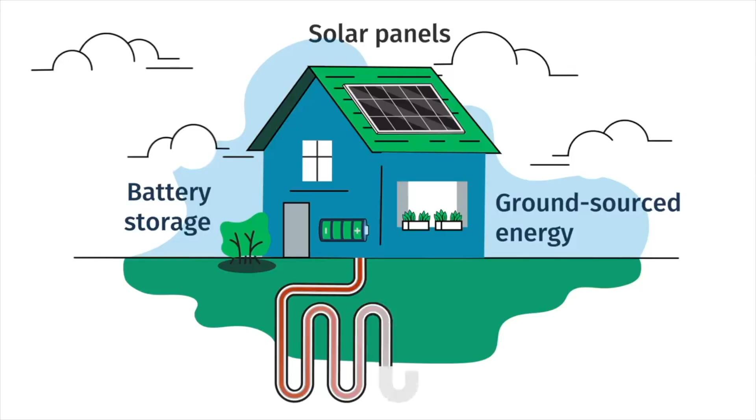Modern, renewable, local energy from rooftop solar, batteries, and geothermal heating and cooling sourced from the ground are proven technologies and are available. These modern systems can withstand climate change, disruptions to the grid, and are affordable too. So how does the Sustainable Energy Utility, or SEU, work? Residents and businesses in Ann Arbor can sign up for this optional utility service. We'll help you determine the right solution for your needs, considering rooftop solar panels, an energy storage battery, or joining a neighborhood ground source heating and cooling system.

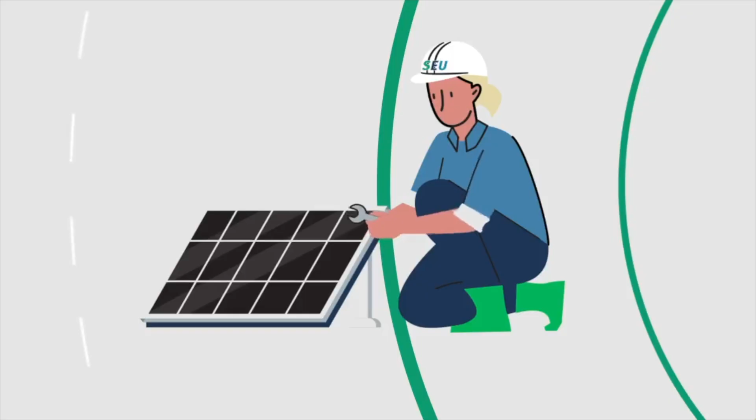We install these systems at no upfront cost to you. Simply pay a monthly rate for clean, green energy from the SEU. You'll stay connected to your current energy utility. However, you'll be using less energy from them, so you'll see savings on your current provider's bill. The Ann Arbor Sustainable Energy Utility will own these energy systems, the same way other energy companies own power plants. So you're off the hook for maintenance. The Sustainable Energy Utility covers the upkeep.

Ann Arbor voters overwhelmingly supported and authorized the creation of this thoughtful, first-of-its-kind municipal energy utility. This means, as a local, not-for-profit, the Sustainable Energy Utility belongs to you and prioritizes our community values, including equity and carbon neutrality. Your rates are invested back into service, operations, and, frankly, our planet, not lining the pockets of shareholders. What's more, we're your hometown utility, based right here in downtown Ann Arbor. The Sustainable Energy Utility is welcoming neighbor after neighbor and business after business to connect. Ann Arbor, you're invited to join. The future of energy lives here.

So we're a utility. As the video told you, we're a completely new kind of utility. There's no model for this anywhere, and no playbook for it. We'll share with you what we're thinking of doing, and you got a sense from the video. But when we talk again in, say, a year, things will be different than we're envisioning now. We are a startup. We are trying things, we're going to learn from how they work, and we're going to pivot. We might pivot some things by next week, and others might take a few years. So we are learning and building this plane as we fly it, and I hope all of you will help be our engineers, mechanics, and consultants through this process.

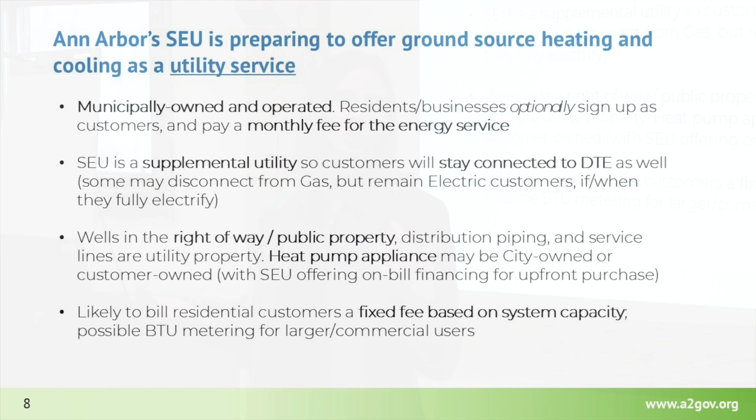Lastly, we are very likely to bill at least residential customers a fixed monthly fee based on their system capacity—so based on their heating tons or something of that sort. We've looked at metering and variable rate billing too, and BTU metering might make sense for larger commercial customers as we build systems serving commercial users, but probably not worth doing on the residential side. For those following what we're doing on the solar side, we're also intending to do fixed monthly rates for solar based on the capacity of the solar system folks are installing.

So this will just be consistent with that. That's the framework for geothermal as a utility service. We will, by the way, be the first geothermal utility in Michigan when this is up and running.

So we are preparing our first pilot system in the Bryant neighborhood, and that's the one we want to talk most deeply about today, although of course we can also talk about how this expands citywide.

For those who aren't familiar with it, we had some handouts describing a little bit of the history of the work the city has done in the Bryant neighborhood. This long predates me, and Missy and her team have done extraordinary work with the Bryant neighborhood, really resident driven, which is one of the things that makes it so powerful. This was not the city coming in and saying, hey, you guys, we think you should be carbon neutral. It was working with the city residents to say, what do you want this neighborhood to be? It's a very, very engaged community.

I've had the privilege of just starting to get to know them in my recent months here. They have committed as a neighborhood to becoming the most sustainable neighborhood in America and the first carbon neutral existing neighborhood. This is really different than building a new development where it's easier to start off clean and fresh. This is an existing neighborhood with homes from the 1950s and all of this old infrastructure, figuring out how to transition an existing neighborhood to clean energy sources and a lot of other work with it.

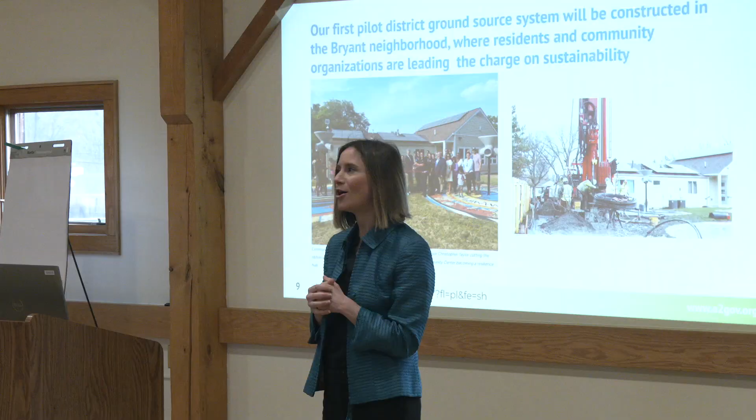Here's a picture of the community center. The Bryant Community Center has solar on its roof, and you can see a picture of a muddy day of drilling. It also has its own geothermal, and hi, Derek, the director of CAN out there. So really, really excited about the work with the Bryant neighborhood.

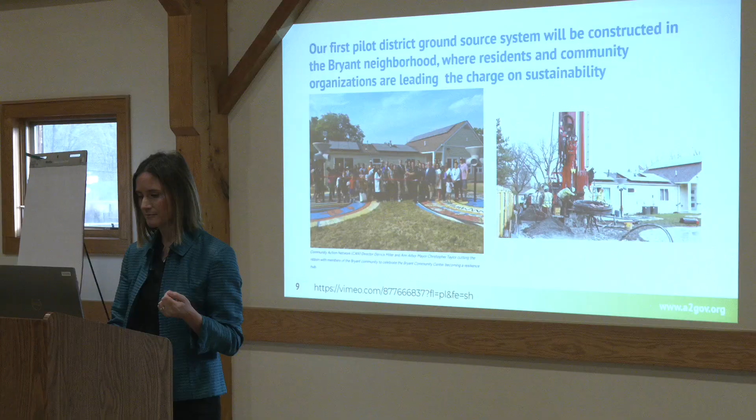All right, next thing about this project. The wonderful news is that the work is supported by $11 million almost from the Department of Energy. We are so grateful for this. Missy and her team again, and IMEG, put in a huge amount of work to get this application ready for DOE and to make the case for why this is an incredible investment for the federal government to help support.

That said, even with that, the economics are really challenging, and that's one of the things I hope today we can have some conversations about and get input from all of you on how we can make this as efficient as possible. Economics are always challenging for a first of its kind project, and there's some things unique to the Bryant neighborhood that might make this particularly challenging. But let me tell you a little bit about it.

There's the $11 million grant from the federal government. We're required to bring a match of that, 100%, whatever we get from the federal government, we have to match. So if we want to be able to use all $11 million that the federal government is giving us, we have to bring a minimum of $11 million in match.

As IMEG has designed the system, there's modular components to it, so we can scale it in different ways. At a minimum, we probably need to spend about $15 million to get a viable system out of it. It doesn't make sense to drill a quarter of a well field or put in a quarter of a pump house. So as you look at the economies of scale, we think we want to do a system that's at least about $15 million.

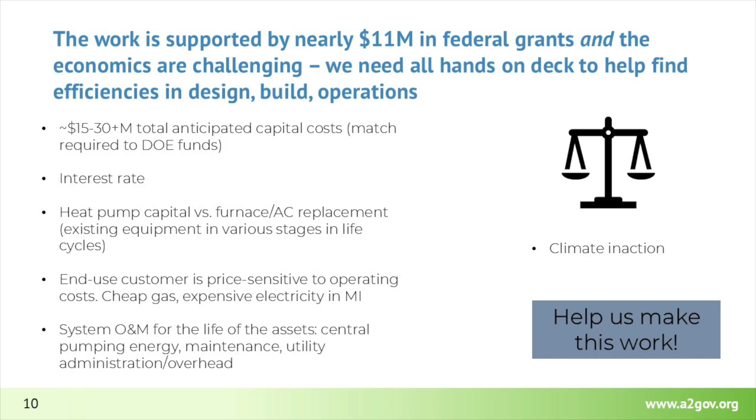So those are the challenges, and I'm looking forward to you guys helping solve it, because the flip side is we could say this looks too hard and walk away. We believe we can't walk away. The price of climate inaction is too high, much, much higher than the cost of all those other things we just talked about. So not solving this is not an option in our minds. We are going to solve this, and we're looking for you to help us figure it out. By the way, municipalities all over the country are watching to see what happens here, so what we figure out and solve here can be replicated everywhere.

Okay, that's my story, and I'm going to turn it over to the IMEG team to show you the actual system design, and you can start salivating over it or getting your questions ready.

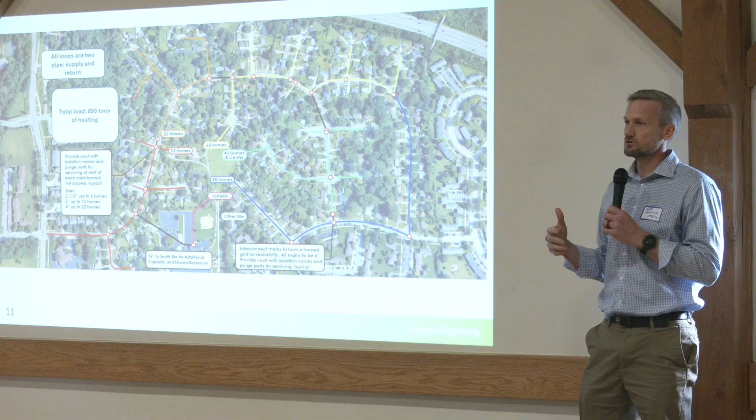So we envisioned how we would serve this area up here to the north. There was also a site to the south which has public works and other facilities, so there was an overall concept to also connect to other commercial buildings, because these systems work best when they can share energy with other buildings that aren't homes.

So I think the long-term vision is thinking about how a community-based system could also hook into these other types of facilities in the future and make a really robust system. I think that's still the vision for this, so we're setting this up to do that.

Walker will go through a little bit more on the distribution, but overall it was how do we capture 262 homes in this initial phase with all these different loops that are up here. So that was the initial focus, with redundancy, reliability, and scalability in the future.

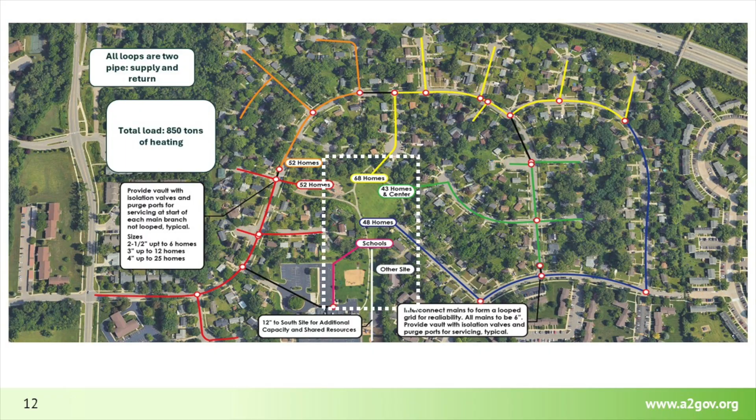Thanks, Adam. So reminder, I'm the geothermal designer for IMEG, so it was my task to look at the community and try to figure out how we could find resources to use to get the BTUs that we need for the homes. There were a few more properties around the neighborhood that we evaluated.

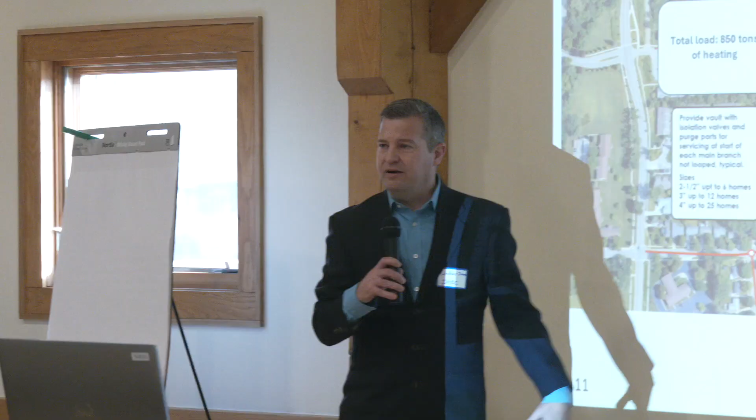But ultimately we decided that the couple of park areas we have here in the center of the neighborhood and around the school made the most sense. We had the most real estate available, and it was centrally located, so it became a really good synergy for us.

So we're planning to drill several hundred holes, about 200 in the main park, maybe 100 on the adjacent site. We were planning to have underground distribution, so we would tie all those wells together through a vault.

We'd bring that back to a central pump station where we could then either distribute out to the community or just recirculate in, depending on what the call is.

So there might be some days when we're just pumping around two homes, sharing energy from one home to the next. And there are certainly going to be times when we need a lot of BTUs out of the ground. We either put our excess heat into the ground in the summer for cooling, or we'll pull it out in the winter.

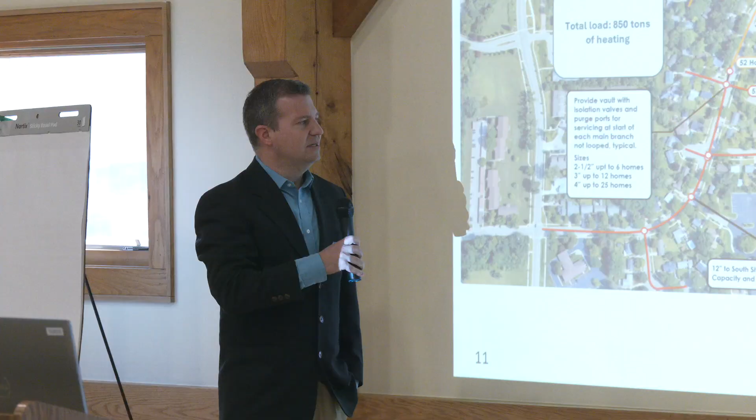So one of the other challenges was distribution, and I'll pass it over to Taylor here to talk more about the distribution. How we get that energy from the central park out to the community was also a challenge.

So we envisioned this, as we're talking here, like a utility system - a little bit more like you have maybe for domestic water distribution, somewhat of a gridded network system where we'd have nodes where we could maintain reliability, effectively pumping out of the central location to all the homes through various networks.

The initial phases of this job will be focusing on a few specific areas of this network, but long term we plan to get distribution to the entire community.

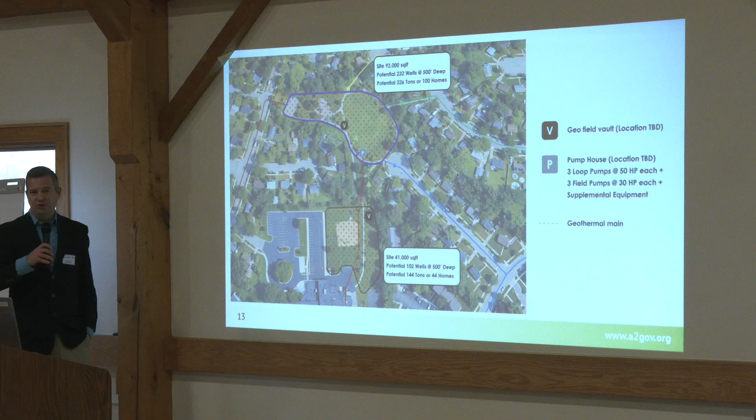And so here's that concept of the geothermal well field, bore field. So again, we've got the main park area. This P is kind of where we envision the pump house. That is still very much a fluid design from our standpoint.

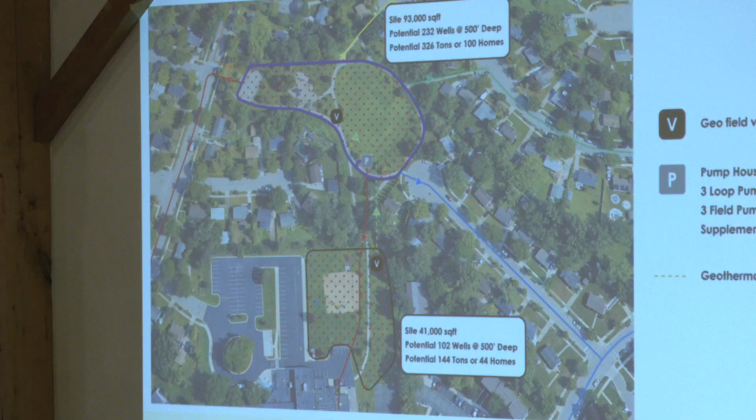We're evaluating building designs and locations as we speak. The V's are basically vaults.

So again, the idea - this rough representation of the wells that we would be drilling - and below the surface, about 6 feet down, we'd have a whole network of pipes joining those wells together, bringing them back to these vaults. And then from the vaults, we would come back to the central pump house.

This purple line basically represents the main distribution loop that we would have. And then all the spurs that would go into the individual blocks and homes within the neighborhood would basically feed off of that spur. We color-coded those to make it a little easier to see - the various colors here basically represent distribution out of this central network to each of the homes in the community.

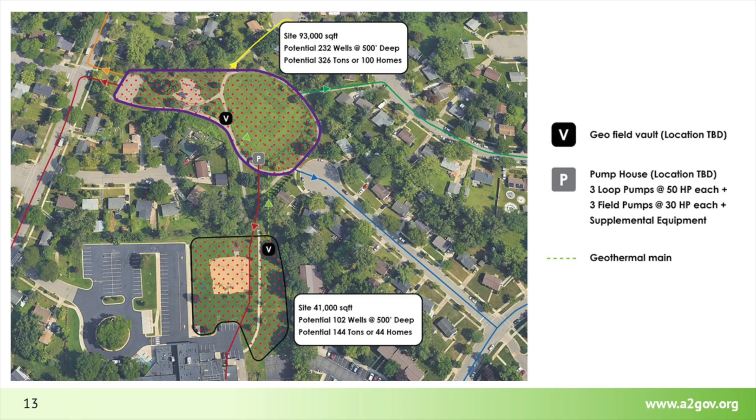And then I'm going to hand this over to Taylor to talk about that distribution.

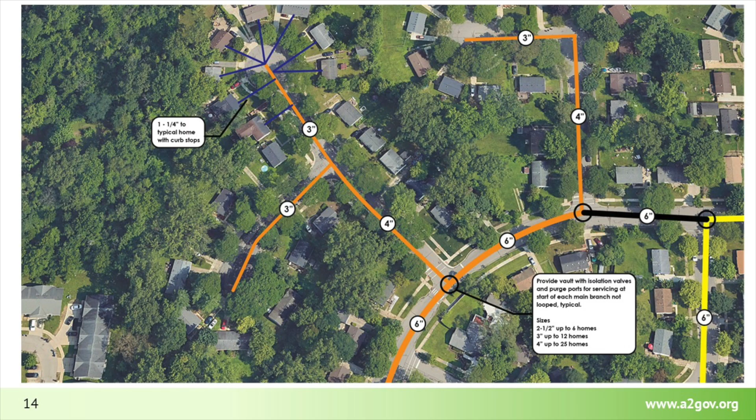And that's the concept at this point. Would love to hear if you think of something different, or something that from a practical standpoint of installing those pipes makes a little bit more sense. So...

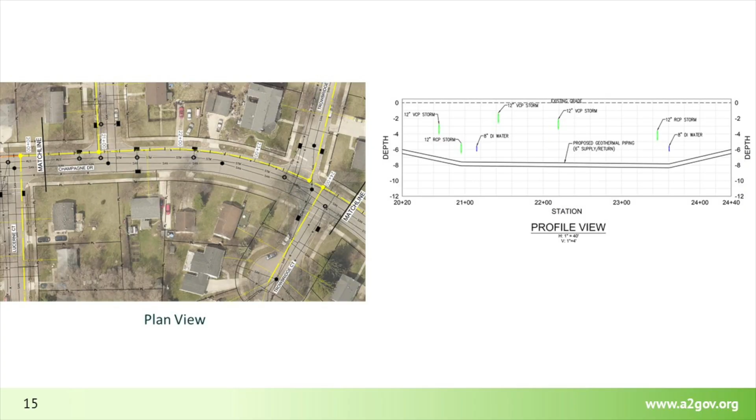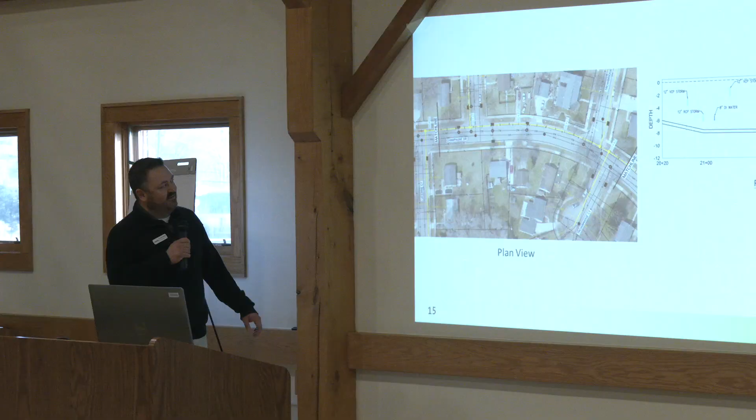That's the typical distribution to home. This is a lot more engineered version of that, right? So if only we just had geothermal to deal with in the right-of-way, in the street, it'd be a pretty simple project, right? But we've got a few utilities we get to deal with.

The first part of that is what does that look like in a plan view, in the XY component? Staying within the right-of-way, minimizing disturbance to the street itself, right? These streets were repaved a couple years ago, so we're not just going to go in there and install geothermal and leave the streets a wreck.

We've got to come back and rehab those streets. How do we approach that as part of this project? Because those are certainly additional costs. We're dealing with wet utilities - storm, sanitary, water - but we also have gas, electric, communications.

It's pulling the needle through the haystack and then finding it on the other end here. The other component to that is, since everything else is already in the ground, we have to go deeper, unfortunately. So this is what a typical profile would look like.

Here's our geothermal pipe, and it's 6 to 8 feet below the surface. It's below our sanitary sewer, which is typically the lowest. So there's some additional challenges there if we're talking about trenching versus boring. All things that we need to think of, and what the best approach there is.

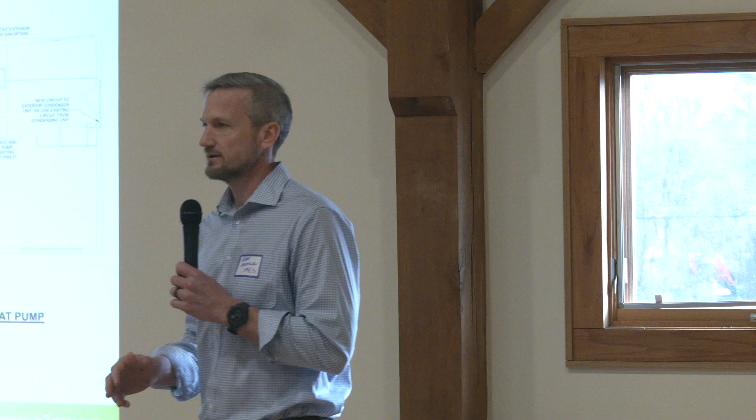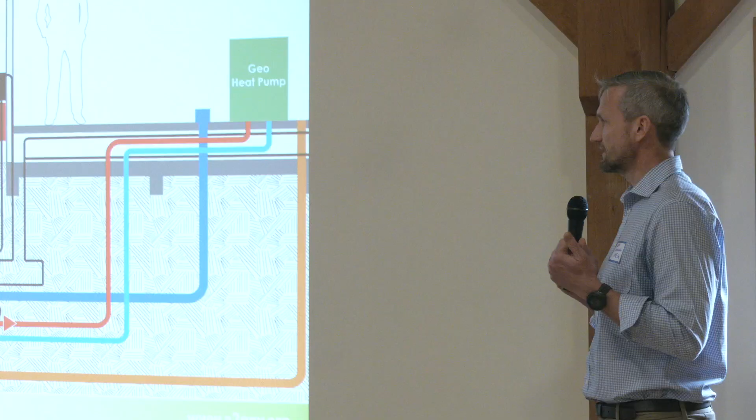We've done geothermal projects, hundreds of them around the country, a lot for individual buildings or homes. As a utility, redundancy and isolation matter. If this central utility has a disruption, you could take 50 homes offline from heating at a very critical time. So part of the network design has separate multiple loops that can backfeed one another, and the two pipe design is there for redundancy. There's a lot of engineering thought going into how this works as a utility, not just a single building with a single field.

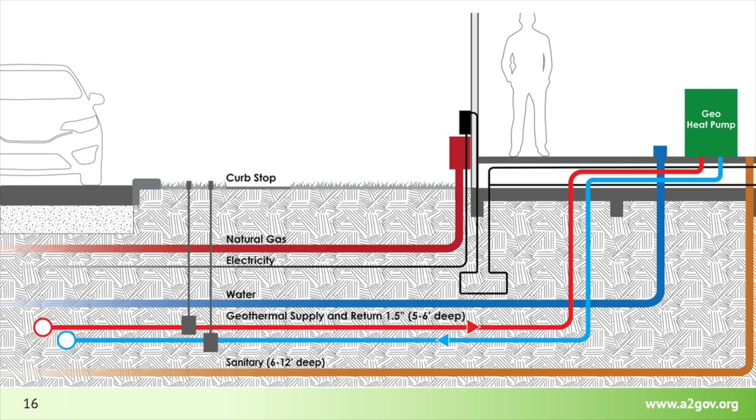Even at the home level, we have curb stop isolation, because if a single home needs some service, we can still run the rest of them on the street. So a lot of that thinking, as we brainstorm today, is how can we make it even more robust and resilient going forward as a utility.

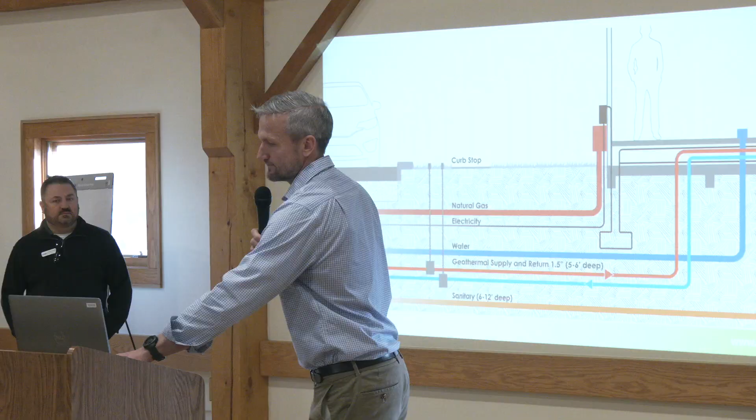Then the last piece is the home. A couple in your room went through these homes with us to figure out where we can put these units. At a high level, a lot of these homes have a centralized furnace in a closet, and most have air conditioning as well. So one option is to just replace it with the compressor inside the home as a single unit, as shown on the left.

Or the other option is a split system, where we have just the air handler in the home connecting to the existing ductwork, with an external condensing unit, which would make it easier from a maintenance perspective. Whether all homes need to go one direction for that maintenance reason, or what the utility decides, is still to be determined, but there are a couple different options, and different homes have different configurations, though a lot of them are set up this way.

So let's talk about schedule.

Right now we just completed our existing conditions survey, identifying where utilities are, where the streets are, where the houses are, really giving us a good background for our design. We've started the design process, and I'd say we're roughly about 30% through it. Obviously, through the grant phase we did quite a bit of work, but now it's the meat and potatoes of it.

As we work through the design, we're also working on procuring contracting, and that's where you guys come into play. At this point we're approaching this as a CMAR, construction manager at risk. I don't know how many of you are familiar with that approach, but it's a procurement move that's pretty nationally known.

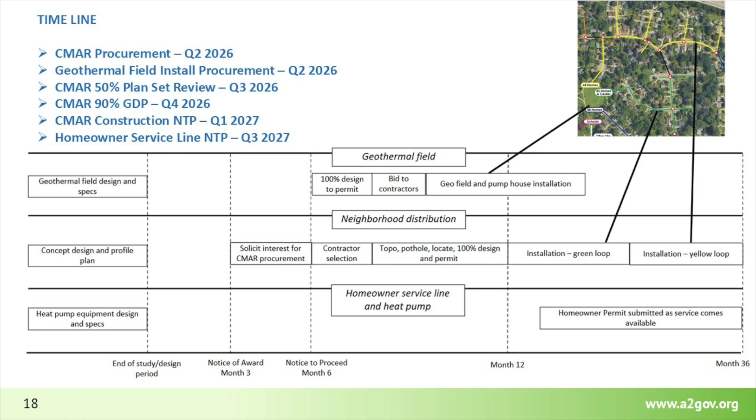The second part is that who better to give us pricing than the contractor. We engineers try to claim we know what pricing looks like, but we're not the experts. So we bring you guys in, we start throwing out options on paper, and then you say, no, that's a horrible idea, or yeah, I like where this is going, maybe do this. So we include the contractor in those discussions for the designs and the standards for the design. It creates a great partnership with everyone involved, and ultimately leads to the success of the owner, which is the city.

So CMAR procurement, we're going to start in the second quarter of this year. We're also working concurrently, and we're not really sure how this is all going to fit. There's sort of three components here: we've got the geothermal field, which Walker talked about, we've got the neighborhood distribution, and then the third item is the homeowner service line and heat pump.

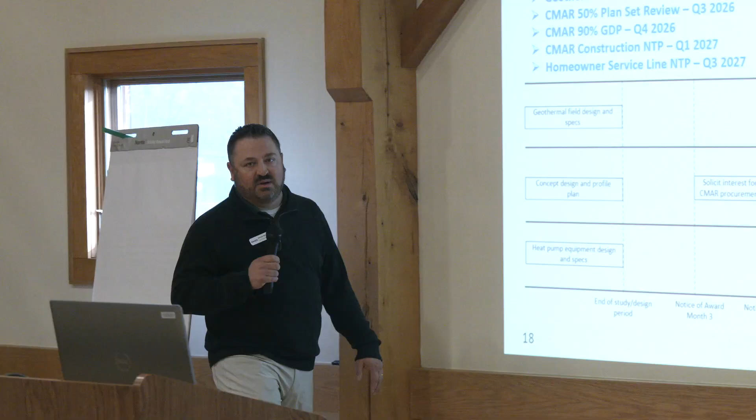So the CMAR contract may include any portion of those. We know for sure it's going to include the distribution system. We're considering including the geothermal field as well. If we decide to go with a traditional design bid build on that, that would also occur in the second quarter. Our CMAR 50% plan set review is set for Q3 of this year.

That's a critical stage because then we hand the plans over to the contractor and say, give us input and give us a price. What does this look like? What are the hurdles? What are the risk registrations there? And then at 90% plans, we're going to get a guaranteed maximum price, or GMP, and that's set for the fourth quarter of 2026. So that guaranteed maximum price is basically what the contractor thinks for the scope of work we've shown, that they can have it installed and constructed at that price.

And that's when the contractor will enter into a construction contract with the city. For CMAR construction, we anticipate a notice to proceed no later than Q1 of next year, with the anticipation that our first service line notice to proceed would be Q3 of 2027. So that's what the timeline looks like, subject to change.

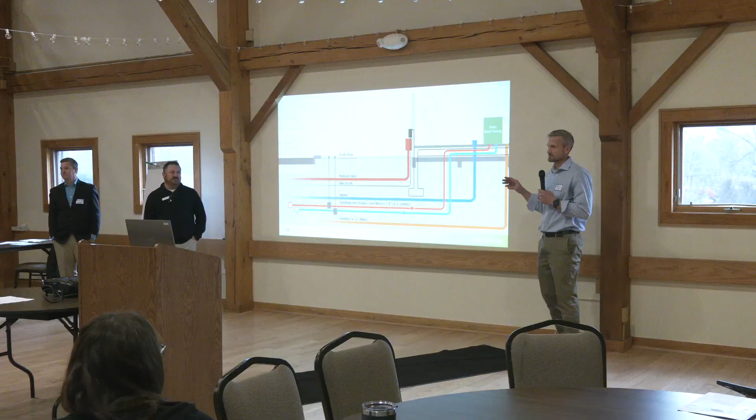I would add to your point, we don't want to dig that hole twice, so that alignment between this contractor and the installing contractor needs to happen at the same time. If those are both procured under the same contract, that would be under the scope of the same general contractor and could be coordinated that way. If they were separate contractors, we would need tight coordination on schedule to make sure those stubs go where they need to go. That's a pretty important piece of it. Any question there?

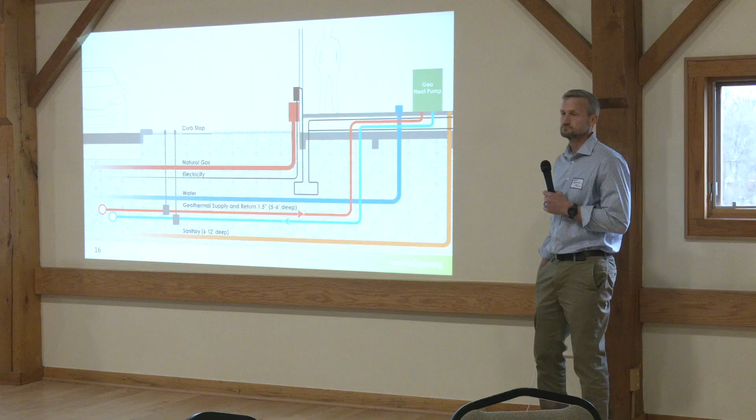I had a question, if you could - you mentioned very briefly about the HVAC. Could you explain a little further about the two options? You mentioned one was a split system and one was putting everything inside the air handler cabinet. And secondly, do you have the distribution of what is existing in those 262 homes? Are they all furnace AC, or?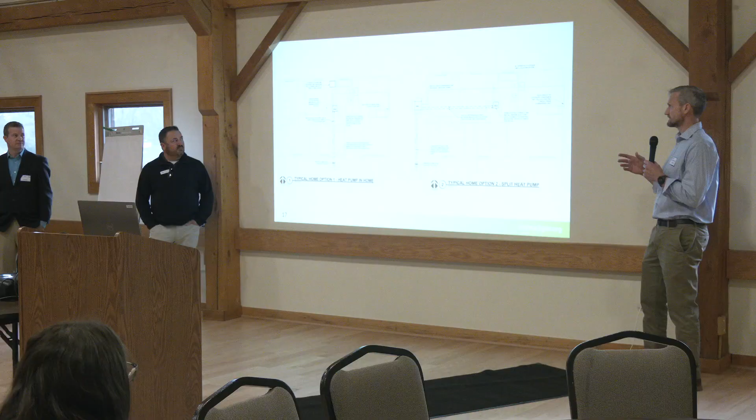Yeah, so the majority are furnace AC throughout all the homes, and a lot of them are this same 1,000 square foot footprint. There are some other mid-sized homes that have a little bit different distribution, and some of those actually have a more dedicated mechanical room in the basement with even more space. So this kind of represents what I would say is the tightest condition for the homes.

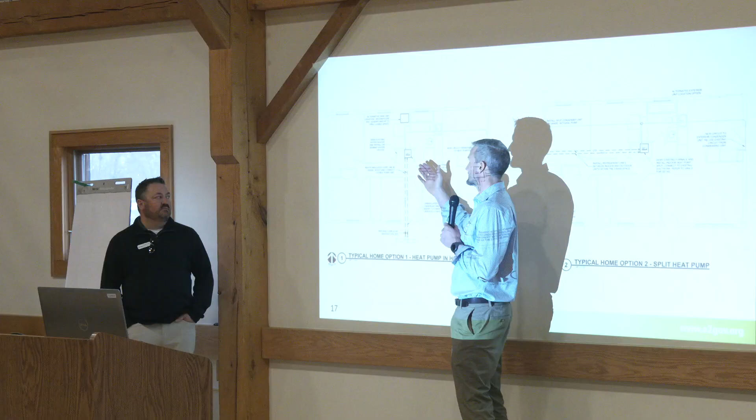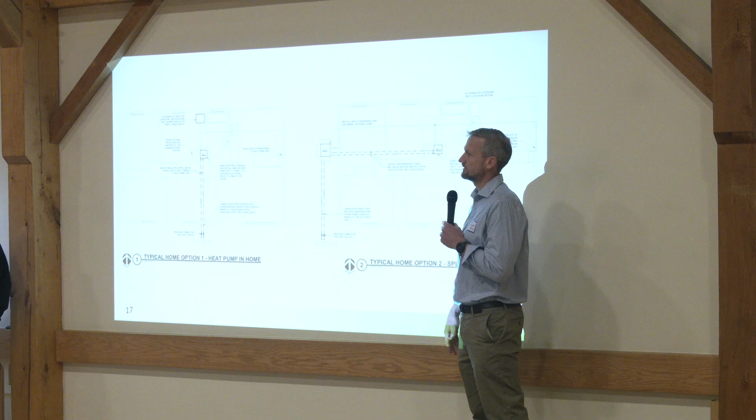So in this case, most of them are more of this arrangement where there is just a dedicated furnace here with the water heater, and then there's an air conditioning unit, usually in the back, that's currently connected. So this option would be just to keep everything and the compressor within this closet, so it would all be self-contained, with pros and cons to that. But we do think this might be the more common option, to have a split system, so this unit is outside, serviceable by a utilities representative outside the home, and then you would just have an air handler here, and the refrigerant piping would go to this outdoor unit.

Are they mostly slab on grade or basement? Yeah, it's crawl space underneath. So that's another piece too, with certainly freeze protection in the line and glycol and those considerations as well. But most of them do have, like what was in that other section of the home where there's a crawl space, you could get through that foundation wall, and then in that case you would come up through the floor.

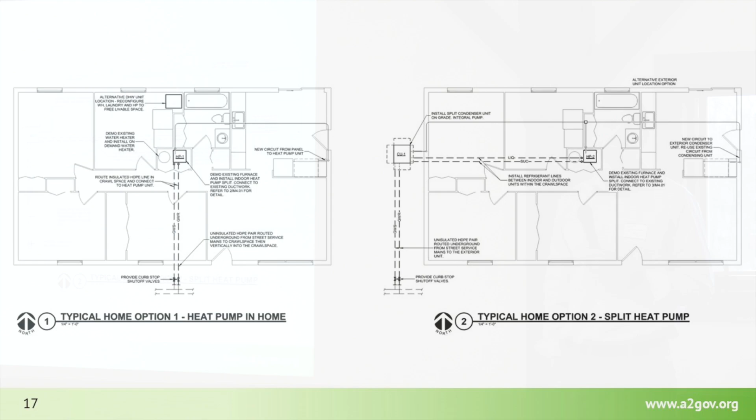Can I just chime in and say, well, first of all, this is Derek Miller. He is the Executive Director of Community Action Network. You can talk for yourself. Do you want to introduce yourself?

Sure. So as Missy said, Executive Director of Community Action Network. We manage 7 community centers throughout Washtenaw County, primarily in under-resourced neighborhoods. And specific to this particular neighborhood, we have our Bryant Community Center that's already on its own geothermal. It's already been converted over, and we're actually 2 gas water heaters away from having it fully off of gas at that particular facility.

It's also a resilience hub that has solar and batteries as well. And this geothermal design is actually part of a much bigger picture that I probably missed earlier, but it is, I would argue, our last critical piece for the decarbonization journey that we have going on for this particular neighborhood. And we're well on our way on the other components as well.

I don't know if I have much else to add other than we're obviously very excited about this. This is one of those kinds of projects that you'd often probably find a lot of NIMBYism just because of how disruptive it actually is. But thankfully, through our planning process with the DOE planning grant that led to this moment, there was a lot of community involvement, and so it's not going to be coming at all as a surprise. We actually had a lot of engagement, a lot of excitement from residents, which we're obviously going to lean into because this is quite the project and quite the disruption as well. But we have a really solid foundation that we're actually building from for it. So excited to try to get this fully launched.

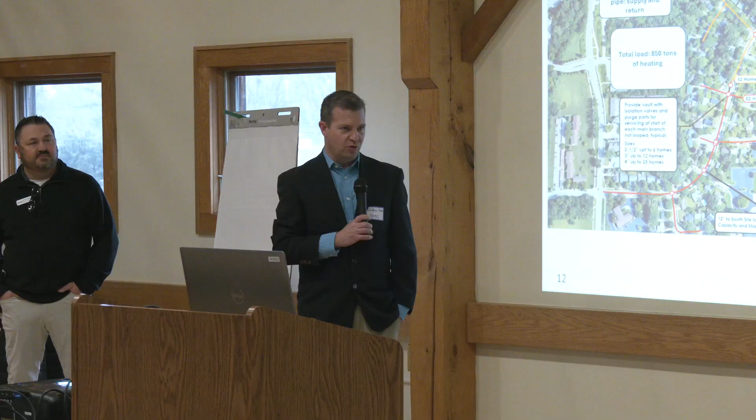Have you thought about a connection procedure for the contractor, where on a typical install you flush the system out and eliminate any air? What's the plan moving forward in the district network? That is one of the challenges. What we're planning is a lot of these nodes, as I mentioned earlier, will have isolation and flush ports. If there's a more localized issue, it depends on whether this is the initial build out, the first 10 homes on the block, or that one home that wanted to do it 5 years later. So the process could differ depending on when it's going in.

The majority of those homes are of 2 similar floor plans with AC units and similar spaces. Would it be beneficial to take the stub-ups to those anticipated locations, to limit excavation closer to the road and do it once? So you could hit option 1 or excavate down for option 2, a one-time dig scenario, just getting it closer to the house.

I think that's a good thing to bring as options. As a utility, having it in the easement with that maintenance piece, we'd just need to make sure it meets those requirements, but I see where you're going with that. And the other piece too, to the pumping losses, we do have a system with many spokes on a wheel, intended to help bring down pumping losses. The other thing we didn't talk about: those black lines between some of the colored loops are lines that could backfeed loops if there are issues with part of the pipes, so we can build in that redundancy. Those nodes become multi-purpose for a lot of reasons in that design.

Did I hear earlier that you'll require a minimum of 10 homes on a block to plan for geothermal in that block or neighborhood? Critical mass, I guess, is what... I'm asking whether it be a neighborhood, or the entire city, has that been defined? I know the DOE go/no-go decision had a line item requiring scale, but I don't remember if it identified the number of customers.

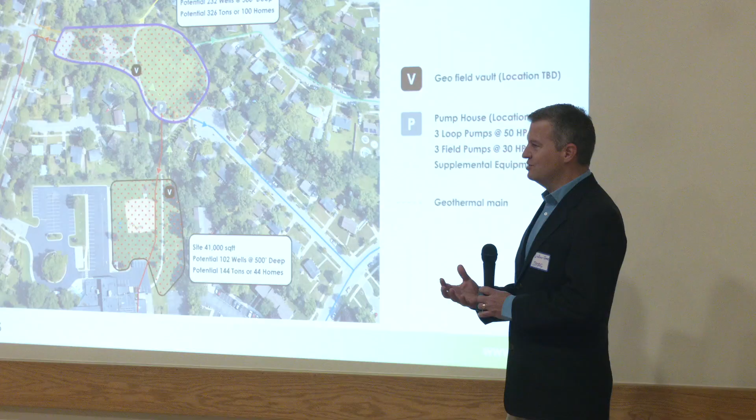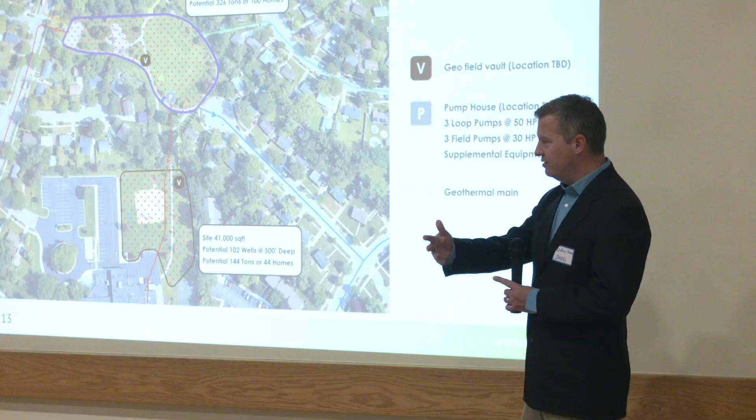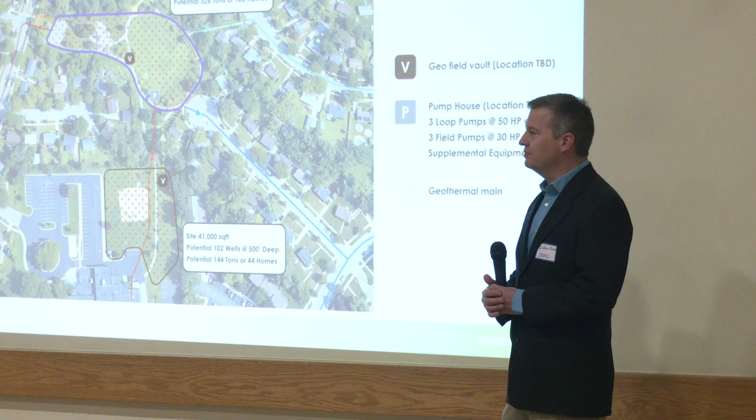Let's say in the main park over here, we've got 200 holes. We may have 1 or 2 vaults. All we're really doing, if we've got 100 holes, is group up maybe 10 of those together onto a common pipe. All the vault does is bring us to a common place where we can consolidate that. Just think of little streets in the neighborhood merging onto the freeway - the vault's basically our freeway. It gives us an ability to phase the construction, so maybe we only need to do 30, 40, 50 holes at a time. We can connect those in, and it gives us a place to isolate those. So if there were ever any issues, maybe somebody came back in and got careless with the backhoe and hit a line, we could isolate parts of the system.

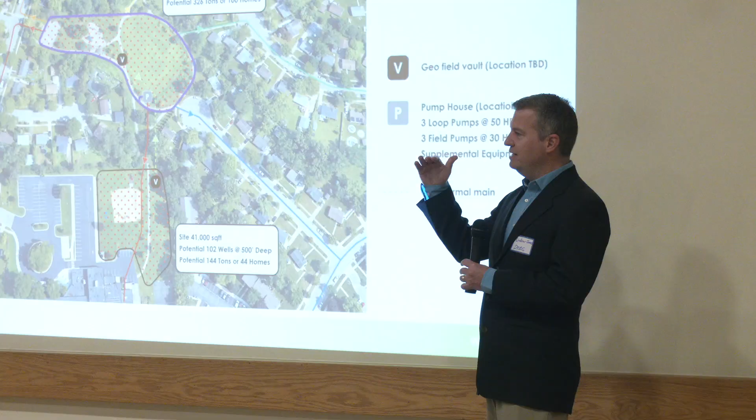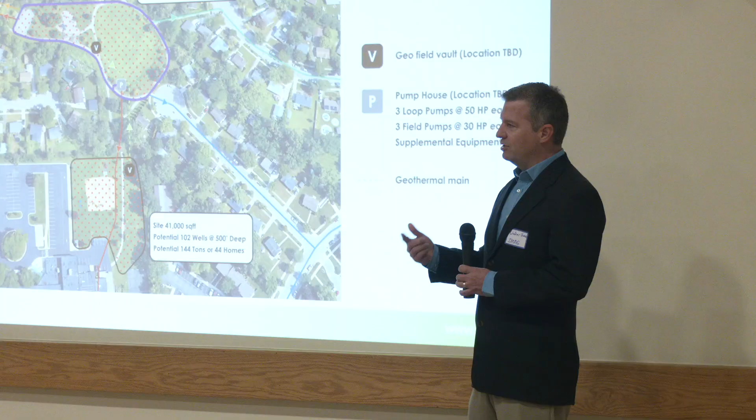The way the system would work, our vision is we'd have one set of pumps that pump to and from the homes. We have a target range of high and low temperatures we'd like to maintain, and when we start to get closer outside of that range, we would introduce flow within the ground to temper it back down. In spring and fall, it would work where some homes are heating, some homes are cooling, and there's not significant load - we'd just be pumping water around the neighborhood, everybody sharing that. But this time of year, when pretty much everyone's heating, we'd be circulating a complementary amount of water to the homes into the ground for heat exchange, so we could bring it back at a more neutral temperature.

Did that answer your question? Yeah?